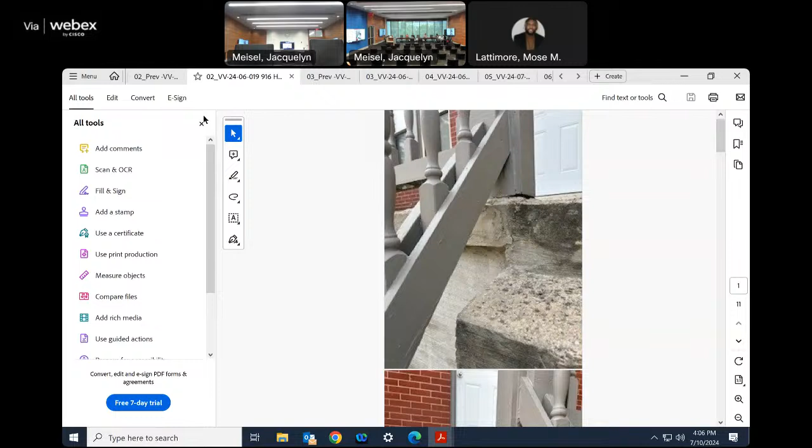I'm gonna have to abstain for 911 Neal Avenue, just based on proximity.

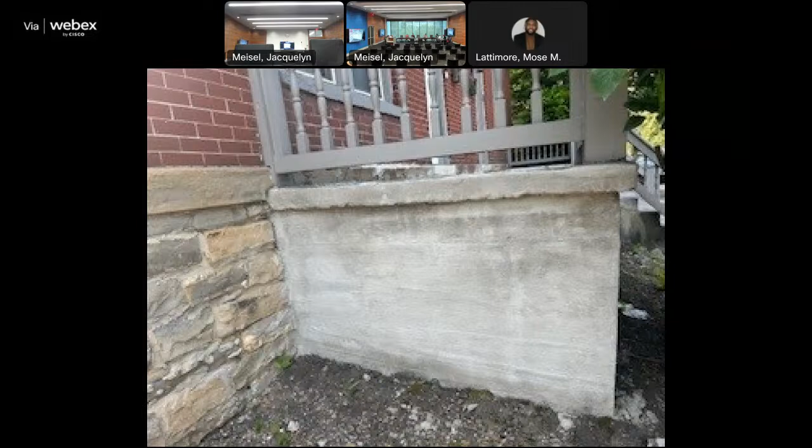They would be bringing new tread, riser, and distance from the sidewalk into code compliance, and in doing so, altering the existing porch landing by removing a 10.75-inch deep cut to allow for the new stairs. The existing handrails would remain, or if not code compliant, stair handrails would be replaced with ones that meet code and painted to match the existing porch railings.

If the landing is hollow, the applicant will pour a new footer approximately 18 inches in length, and the width of the stairs 83.50 inches. The length will be 12 inches back toward the house, with 6 inches extending past where the first stair would begin. The new block would then be laid out from the footer to the edge of the porch, and that 83.50 inch opening would provide support to the porch slab on the entire perimeter, which is how it is currently constructed.

So at the area where the stairs meet the slab, there is a small curb around the perimeter above the base walls of the porch. The first option is to wrap the curb around the first stair where the cutout of the slab will be. The curb will be slightly longer in length on the inside of the stair, and the first stair will be slightly shorter in width, but would still be code compliant in both options.

Option 2 is to start about 8 to 10 inches from where the curb meets the stairs and gradually grind the concrete down, and the curb transitions into flat.

We have the prior staff analysis included, and so the staff recommendation is to recommend approval of application VV240619 at 916 Harrison Avenue, with the condition that if the landing is hollow, scaled and measured section drawings are to be submitted to HPO staff detailing construction of the new landing and steps. That recommendation is based on the city code for standards of alteration 3116.11. I believe that is it, so I'll turn it back over to the commission.

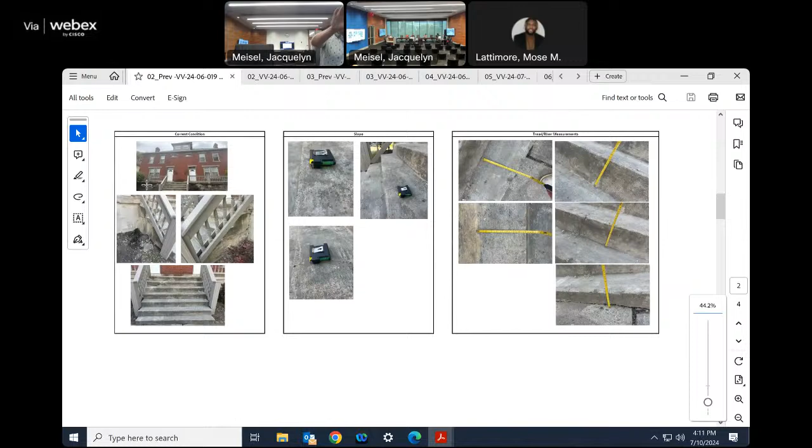Or we just pull that curb all the way around, keep it going, and where you're doing the cutout with the new stairs, it just transitions into the back of that first riser. Awesome, so that way it kind of keeps it all the way around and keeps the aesthetics.

Awesome. And then at the same time, the recommendation from staff - probably, did you hear that in terms of being able to provide drawings, if all of a sudden the slab is hollow, being able to provide drawings that would give them a better understanding of what's necessary for those details prior to execution? Staff is asking for - I did kind of walk in, I think, as that, so if we could just get a little bit more detail on that, so I understand, would be helpful.

Would you be able to just repeat that recommendation component? Yeah, absolutely. Thank you. So the staff recommendation is to recommend approval of the application with the condition that if the landing is hollow, scaled and measured section drawings are submitted to HPO staff detailing the construction of the new landing steps. Okay.

So for the drawings, I could mock that up and resubmit tomorrow. The difference is just going to be whether we're installing additional cinder block. I think from a standpoint of illustrating the scope of work, that gives the staff something to look back on.

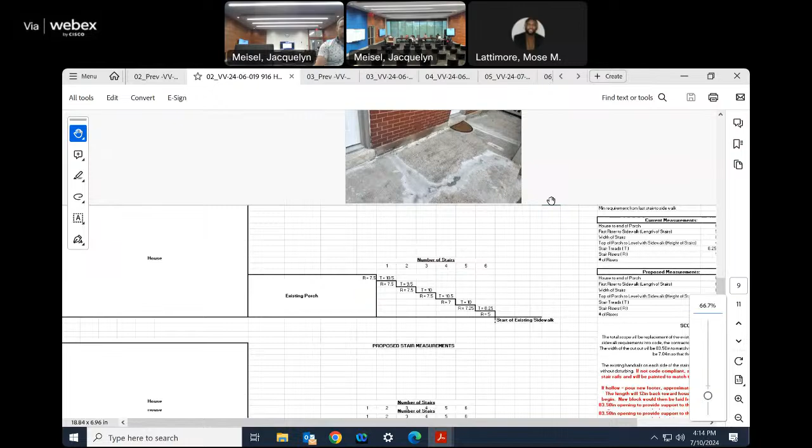I would also say the condition that if the handrails don't meet code, the code compliant ones will also be resubmitted. Yeah, I had that on my list too. Perfect, awesome - that's the railings themselves, right? Yep, I did see that. Okay, that I don't think we'd have to have ahead of time.

Absolutely, yeah, we'll do stairs and figure out the railing after, and just ask them to come back if I have to, or if it's administrative, whichever - but yeah, separate approval process.

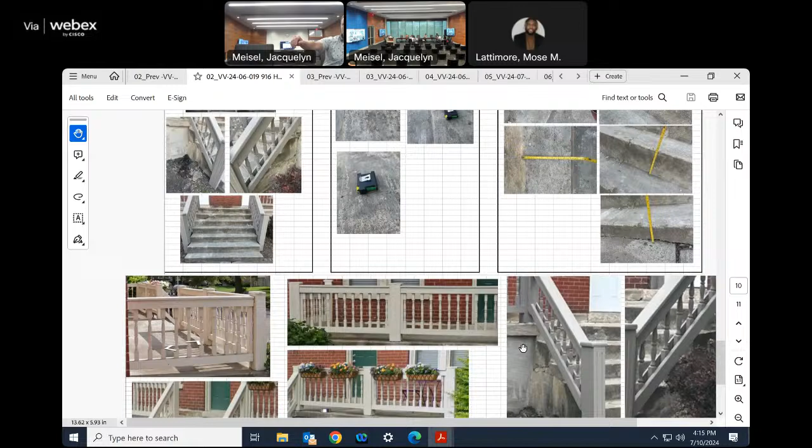Okay, very helpful. And then, would you be able to scroll up to the mock drawing, so I get you guys what you're looking for? I tried to do my best there on the bottom one. Do you just want a little more detail as far as here's where the cinder block would be? Yes sir, easy enough.

Kind of thinking about a cake, and you're taking a knife and going through it, and you open it up a little bit and see the side elevation of those conditions. Yep, I think that would help them. Some anticipated dimensions gives them a little something of how that works.

Awesome, all right, is there a motion? Yeah, motion on application VV 2406019, 916 to 918 Harrison Ave, to approve the application as submitted with the following conditions.

The owner is going to submit scaled section drawings ahead of time, so that in the event the landing is hollow, that documentation is there and work can continue to happen. The edging of the porch - the curbing will be extended along the new stairs. And as a clarification, railings and approval of any railings are not included in this application.

Is there a second? Second. Any additional discussion needed? All those in favor say aye. Any opposed? Motion passed. All right, thank you sir, appreciate everybody, have a good one.

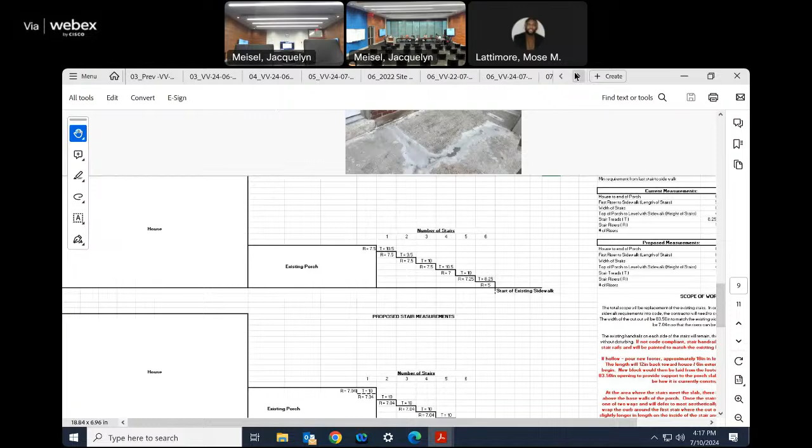Which application are you here for? Greg Zanitos, 76 Bowles.

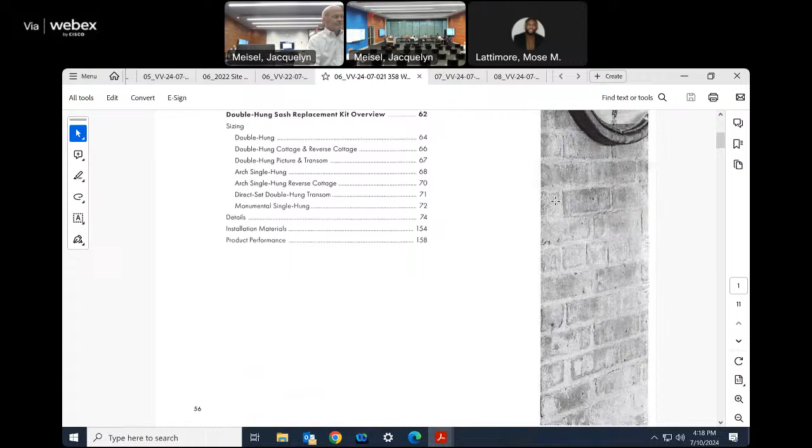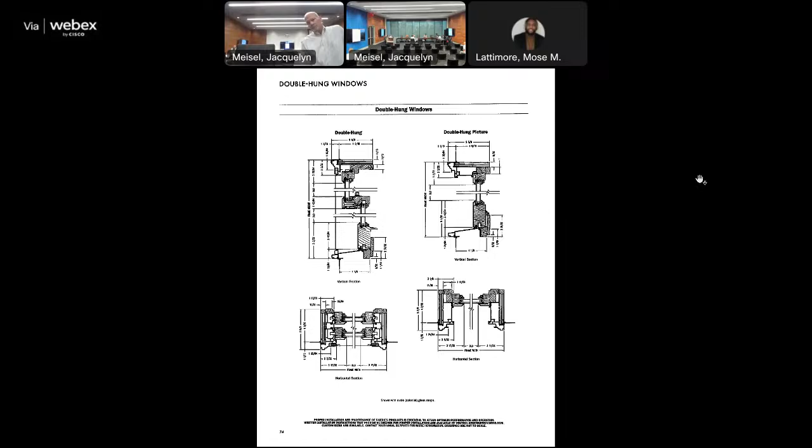All right, so this application for 356-358 Wilbur is proposing to remove and replace the original windows on 358, which is the left side of the property, with Andersen E-Series double-hung windows to match the third floor window from a test case in 2022.

So the applicant has clarified that only one window was replaced and the others on the side remain in place. The third floor window was approved to be replaced with the Andersen E-Series in 2022 as a test case. The full replacement was also proposed during the 2022 application. That portion was continued at the September 19th, 2022 hearing.

The commission comments from the hearing included the following. Fisher said that they sympathized with the applicant regarding the windows. Some of them do recommend repair. It's recommended to reach out to Columbus Landmarks so that they retain with subcontractors to do work such as window repair. So HPO staff had previously determined that the windows should be retained and repaired, having conducted a site visit on June 24th, 2022, with myself.

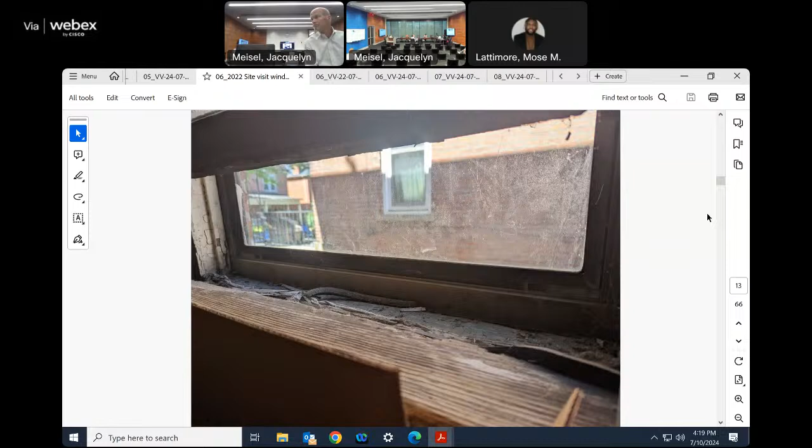No applications for repair have been received, so the commission will need to determine if the remaining windows should be retained or replaced. If the commission determines that the existing windows can be replaced, HPO staff highly recommends that the first floor picture window on the front elevation is retained and repaired. This is because those windows can often be difficult to replicate, and also due to their location, they're often the best preserved window, being underneath the porch there on that first level.

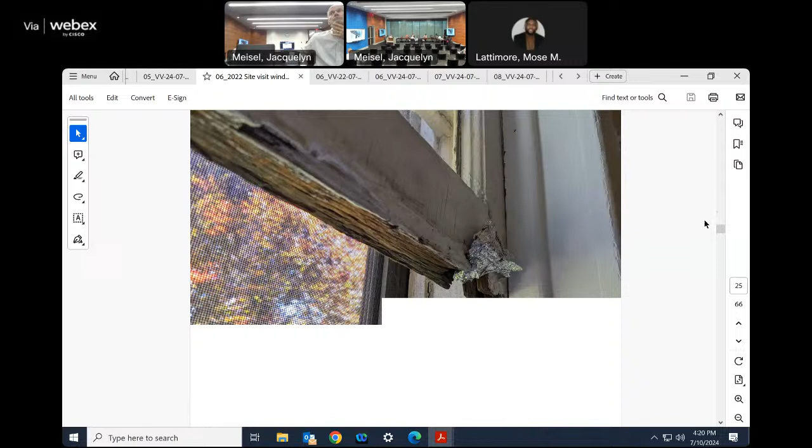Additionally, HPO staff would recommend replacement windows from the approved windows list. So far with the Andersen windows that we had seen, the proportions and the thickness of the stiles and rails are not quite meeting the historic window proportions, and there's some details that don't quite match, such as miter corners that I see on Andersen windows.

So the staff recommends continuation of application VV 24-07-021 at 356-358 Wilbur Avenue to allow the applicant time to submit additional detailed photos of the currently installed third floor test case window. The basis for the staff recommendation is the Victorian Village guidelines regarding windows and doors, as well as the city code standards for alteration.

3116.11, and then some additional city code here, we have the amendments to the city code regarding window replacement. I think that's all for the staff recommendation.

Thank you, Jen. Can you state your name, sir, and be sworn in? Gary Batke. Perfect. Do you agree to tell the truth and nothing but the truth? Yes. Thank you, sir. All right, I'll turn it over to you.

Okay. I filed the original application to replace the windows in this property back in June of 2022. The reason I did that is because the windows are unsafe. They've got lead paint on them. Many of them do. Most of them are not operational. It's a fire hazard.

I applied to replace them only after looking for over 6 months to try to find a contractor to help repair them or to solve the problems I just discussed. Anyway, so I filed the application in June of 2022. I got the COA, as was noted, for the third floor windows.

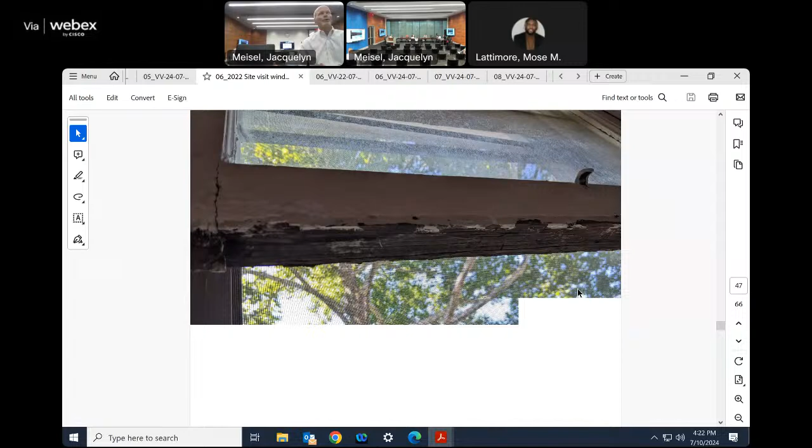I would disagree that they do not comply. They're indistinguishable. During that whole process, when I was at like 4 or 5 different meetings, I brought a cutout of that window. I can bring a cutout of any of the approved windows, and I guarantee you couldn't tell the difference. It's the same material. You couldn't tell it. They look exactly the same. It's aluminum clad wood on the inside.

Anyway, so after that meeting where I got my COA, I proceeded to try to do as you suggested. I called Susan Keeney. She came over. Very nice lady, by the way. Had a nice discussion. She gave me a list of 8 contractors, and suggested that I call a couple to see, because the suggestion from Susan and from you is to see if we can't repair them first. Makes sense, fine. I called, I contacted, emailed, called multiple times, all 8 on this list.

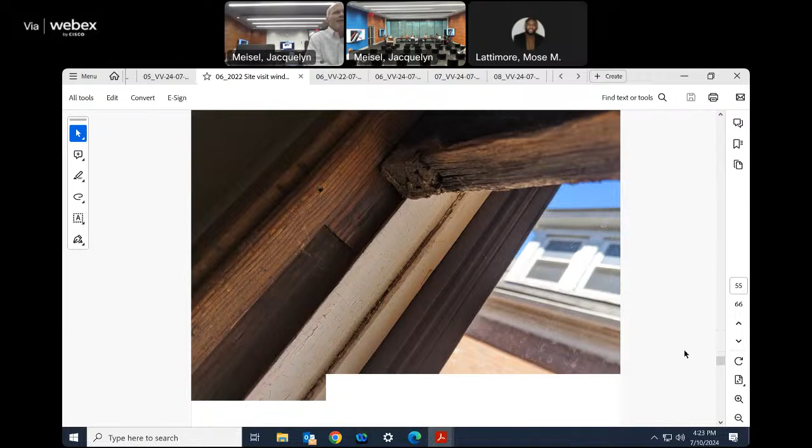4 never returned multiple calls or emails. 2 are no longer in the business. 1 promised to contact me sometime in 2023 when they might be able to squeeze me in. I'm still waiting on that call.

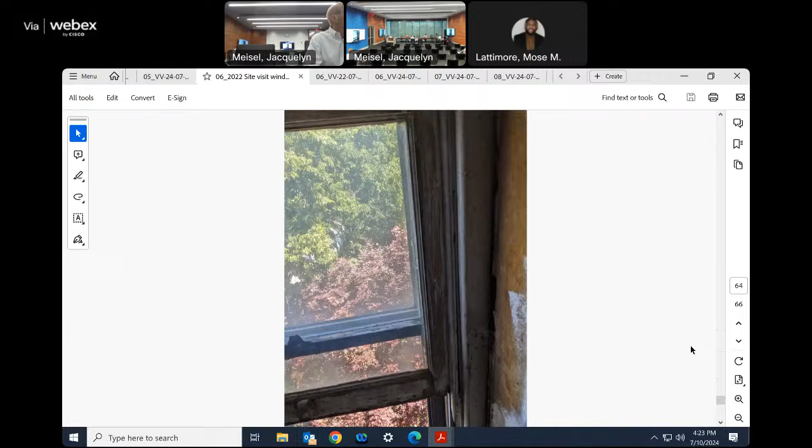And 1 actually came to look at the windows, agreed that there was a problem with lead paint, was to promise to get me an estimate, and then since then has ghosted me. Never gave me an estimate, never returned my multiple emails, never returned my calls.

Don't know if he's out of business, don't know if he retired, don't know where he is. Okay, so I've exhausted that list. So I'm now at the end of 2023. I've got the same problem. I had done everything you asked me to do.

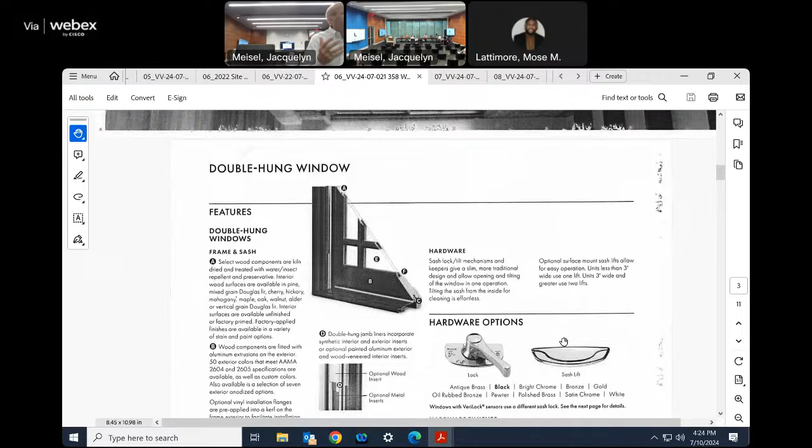I made arrangements to replace, incrementally, the ones on the side of the house, not facing the front of the property. I intended to continue to do what you suggested, and respect the front of the house in particular. But the sides of the house, for all the reasons I talked about, for safety reasons, for energy efficiency, there's really no reason that side cannot be replaced, especially with windows that you approved on its test case, and cannot be distinguished from the windows on your approved list, other than being a different manufacturer.

Moreover, on the side that I started to replace them on, they're literally 10 feet from vinyl replacement windows in the house next to me. So I would ask that I be allowed to replace those 6 windows on each side of the house.

If you want me to continue to try to respect the front picture windows, those 2 front picture windows, I'm more than happy to try to do that. But I've been doing that for 2.5 years. And I've begged the commission, Susan Keeney, and others who say they can be repaired, to tell me who can do it.

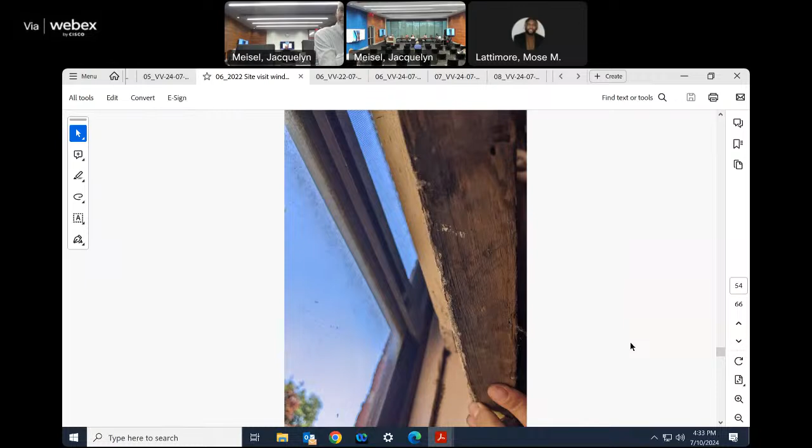Thank you. No, they look to be in pretty solid condition. There's a couple of missing or cut sash cords. We have some glazing, kind of standard fixes that are repaired and needed over time for maintenance, things like that. So if you recall, overall pretty good condition.

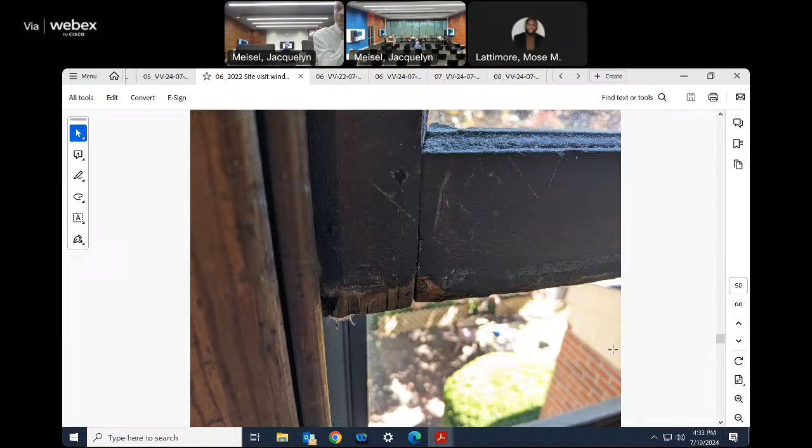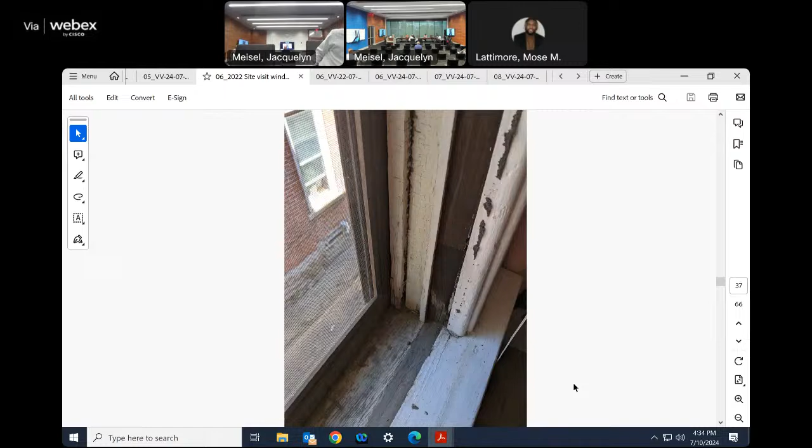I'm not sure if that was during the pandemic with responsiveness from Pella and window repair people. Since we get so many window applications throughout our commissions, I'm hopeful people are more responsive now, whether for new windows or repairs. Hopefully it was just during the pandemic that we weren't getting responses, and new windows were pushed out a year or two.

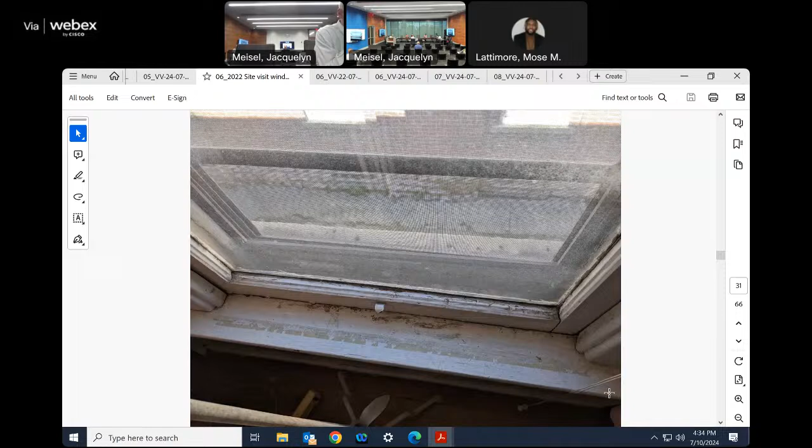I would state this really wasn't during the pandemic. The application started in June of 2022, and I was in contact with these people through the end of 2022 into 2023. We hear so often about supply chain issues, and it continued into 2022, since people who couldn't get things done in 2020 or 2021 were just so backed up. It's common for us to hear of these issues, and not being able to find contractors is very frustrating.

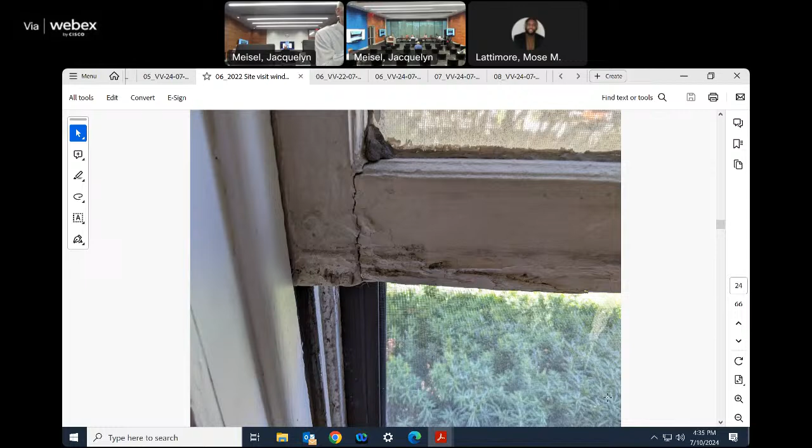As I recall, part of the decision for the test case, we were all here for that, I think. I believe the third floor windows were in the worst condition of the windows we had looked at the time. Right, they were not in great condition, but not necessarily worse.

What I'm struggling with, and what I think we've been fairly consistent about even back to 2022, was having staff look at the existing windows and provide recommendations on whether those could be restored or not. We clearly gave that guidance at the time, and you tried to do exactly what we told you, which we absolutely give you credit for. So we continue to provide that same guidance to other applicants, right?

We had another one on the agenda that got pulled for a very similar type of thing. I want to make sure we're not skipping over that step, and how we want to handle it. If applicants aren't able to find contractors, I think that's something we need to discuss. That's a tough discussion. Staff will need guidance from that perspective, and I think it's part of the test case analysis and evaluation, to Reed's point, about where the threshold is between hardship associated with repair and a condition that pivots to replacement.

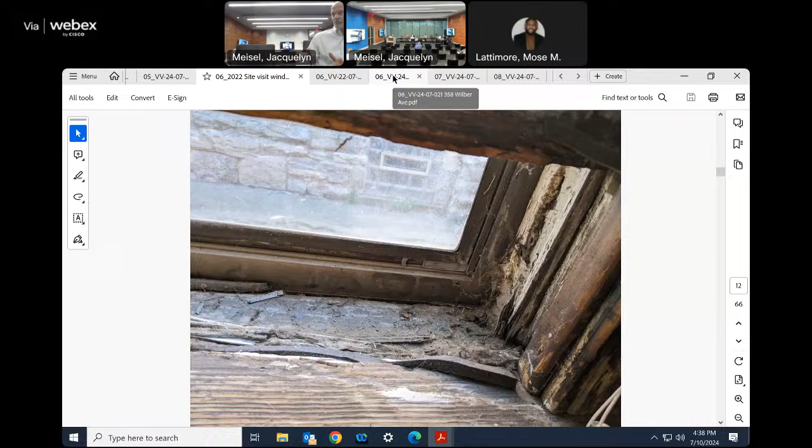So I'm supposed to send pictures of the test window? Yes, if you could send detailed photos of the test window, that way we can take a look and see what is matching up or if things are not matching up.

There's some details that can catch on the side, but I'm not sure if they're exactly the same as the attic windows to the side, or if there's any other details we can take a look at and evaluate. I'm happy to do it. A little bit of a problem, as you can see - that's 40 feet in the air.

The interior side is good, and if you're able to, depending on how your attic situation is set up, have a camera - we're still safely inside the building - take a photo kind of close up, rather than a selfie photo with a ladder. I can try. Okay.

We don't want you having to go on the roof or something. Well, I think it's the same window as the one downstairs, right? Yeah, exactly. So if you can get more detail shots on that one, and if we know those apply to the upstairs one - not saying we don't want pictures of the upstairs one, but that'd be helpful, that might make it a little easier. Okay, I will get those to staff.

Staff will provide maybe some old meeting minutes or applications of where windows have been repaired, and that relates to this contract. Oh yes, we can take a look at some recent ones that have been responsive for folks. Correct. Thank you, Reed, appreciate it.

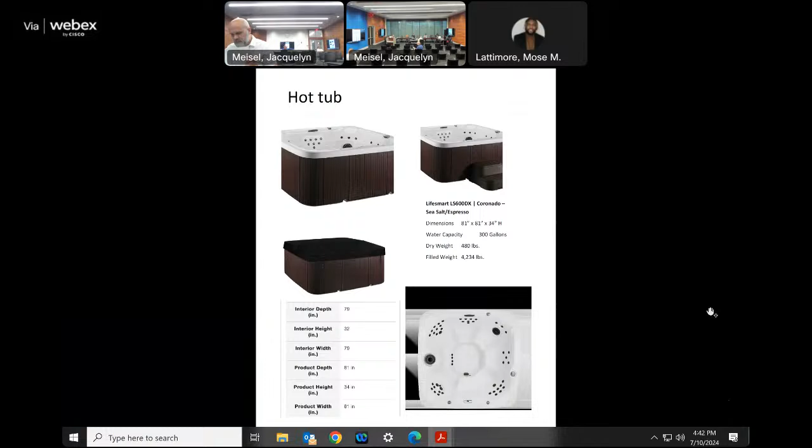So we have the staff analysis from the prior meeting in June, and the commissioners should discuss if the bocce court is an appropriate landscape feature and whether other similar courts would be allowable in the future, and the overall height of the proposed gazebo should be discussed.

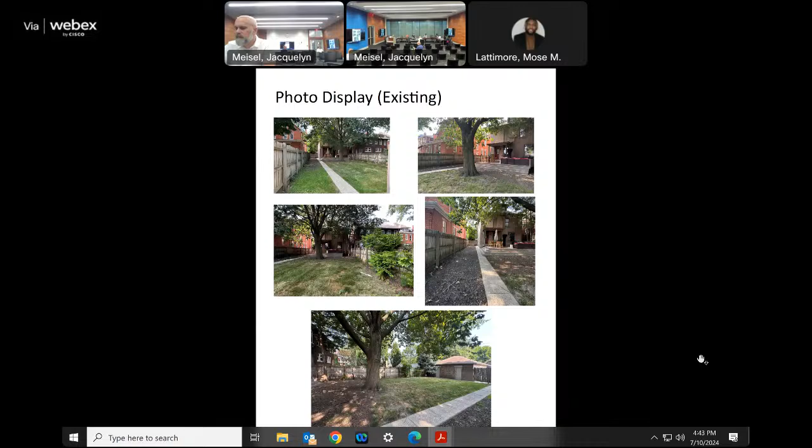The staff recommendation is to recommend approval of application BB 2406025 at 110 West Second Avenue with the condition that a scale measured elevation drawing of the gazebo in relation to the garage is submitted to a subcommittee review or to HPO staff prior to issuing a certificate. The basis for that recommendation is City Code 3116.13 standards for site improvements, as well as the Victorian Village guidelines regarding fences and accessory structures.

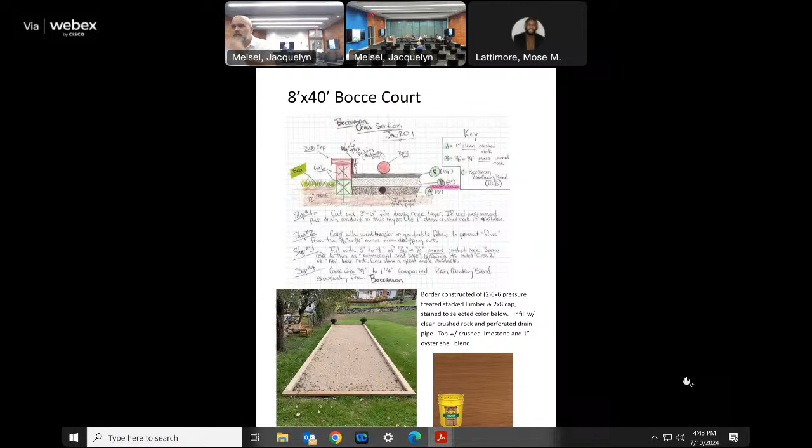Awesome, thank you Jack. Just a clarification - staff's recommendation talked about a pergola, I think they meant the gazebo. Oh, thank you, we'll make sure. Yes, that's right, the pergola mention is separate.

Thanks, Reed. Can you state your name, sir, and get you sworn in? Thaddeus Jones. Do you agree to tell the truth and nothing but the truth, sir? Okay, all right, so I'll turn it over to you. Anything you want to present, or just kind of walk us through - I think you got the latest site plan there.

Basically, I think we talked before about maybe elaborating the canopy, the tree a little bit to show that more realistic, which I'm showing there now. So it gives us a more realistic view of how that tree is in position to the landscaping elements. We also shifted the gazebo structure back a little bit, so it's not underneath the canopy so much.

Also, the owners decided not to do the fence, so we are eliminating that out of the context here. After a closer examination, I think it's going to need to be replaced sooner than later, but he doesn't want to deal with that right now.

Let's see, other than that, I think that's it. Okay, perfect. Thank you, sir. All right, Commission, are there any thoughts or questions?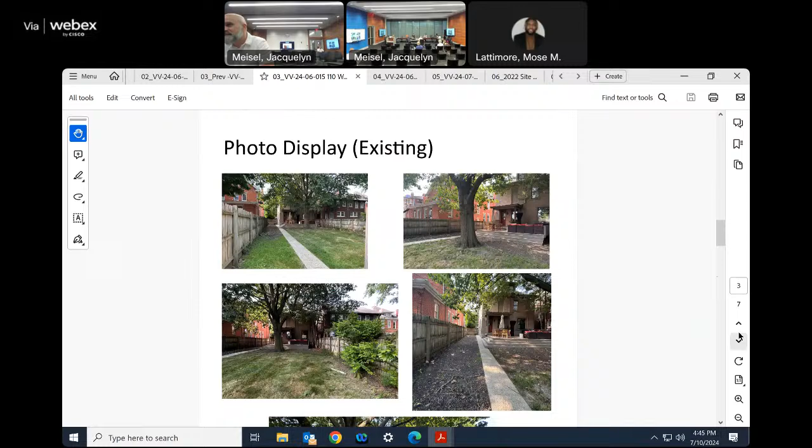And then it makes sense in terms of the height. I think that they were asking for a scale drawing just to kind of clarify the height. The perspectives that you did were great in terms of being able to get elevation, but just being able to try to understand the height of it related to the garage - I think that's what they were asking for in terms of clarification.

As far as this one, since the last meeting, no. Yes, I think that's what the staff was just mentioning. Gotcha. Yeah, okay, so you just need the actual dimension of it?

So, for instance, the eave height of the garage is X, and then the proposed eave height of the gazebo was X, and that probably would suffice, being able to clarify that.

I mean, I should have started with, I think it's an improved design. So I think we're better than where we started. So I appreciate you guys, you and the owner, taking the feedback seriously and coming up with some alternatives here.

I don't think I have anything to add. Do we need to know what plants there? For instance, that shrub - it says new shrub. Where's Tim when you need him? You know, Tim would be able to help us a little bit.

Well, that sounds like a subcommittee and all this stuff. Yeah, do you get that detail? Okay, yeah. And so typically it is being asked what are the species, just a little bit more understanding of that. If Tim was here, he would definitely make sure that we're asking that question.

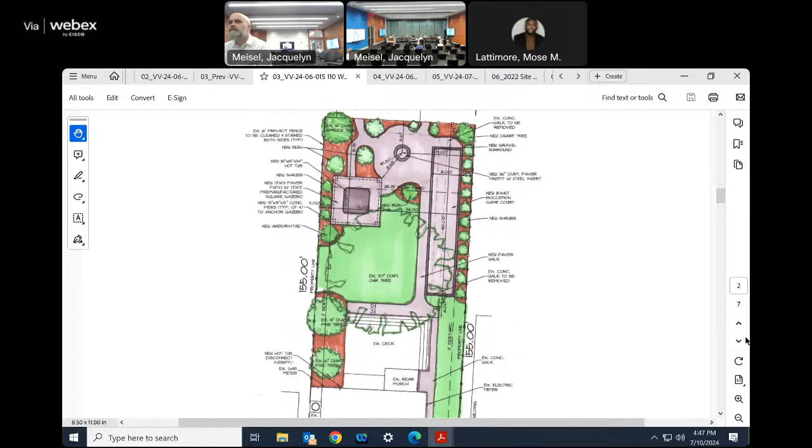Is there a concern on like the type of plantings? Is it something that can be moved to staff, or would you prefer to put to someone? It kind of sometimes gets pivoted back to us because Tim kind of likes - do I put Tim on the committee if he's not here? Yeah, we're gonna, I don't know whether we can. By default, he would want to be on. Yeah, exactly, just to help the application move forward.

Perfect. So is there a motion then? And what about the bocce court?

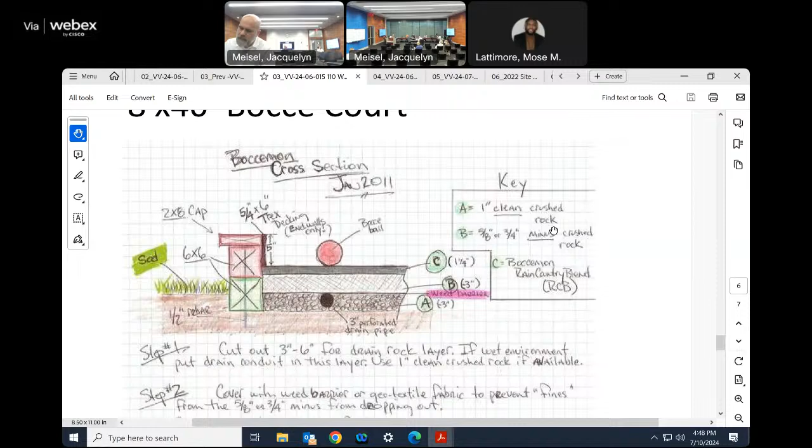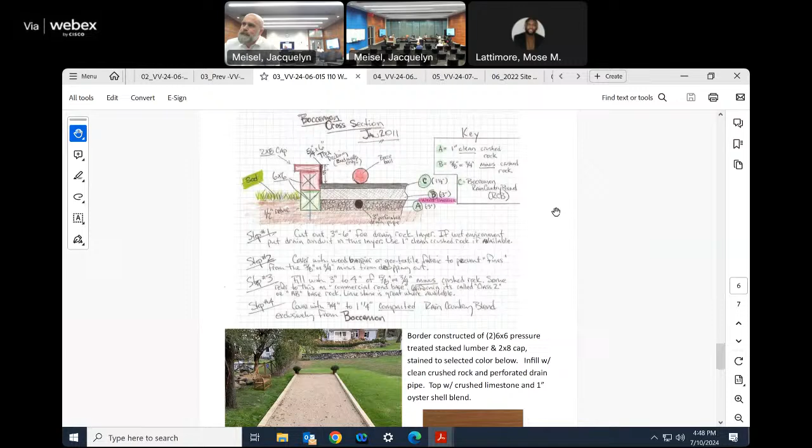Anything to add? I know we talked about the bocce court last time, and it didn't seem like there was any concerns. Right, yeah, the staff had some concerns, that's why I'm just making sure. I think it's just more, if I remember correctly, it was our unfamiliarity of a bocce court being introduced into a project, but it seems like the sensitivity to what it is, the picture helps too, picture height helps, and materiality - there didn't seem like an issue. It's like, yeah, it's cool.

All right, well, I think we can do a motion. Motion on application VV-24-06-015, 110 West Second Avenue, to send the application to a subcommittee for their review of the height of the gazebo in relation to the garage, which the applicant will provide those heights and details for review, and review of the plantings also to be provided by the applicant for subcommittee review.

Subcommittee is going to be Tim Skinner. I'll do it. Pete Schuler - I'm not a plant person. You're not, well, you're a height person, I don't know. I'm not either, but I'll do it. I guess I'll be the third. Awesome.

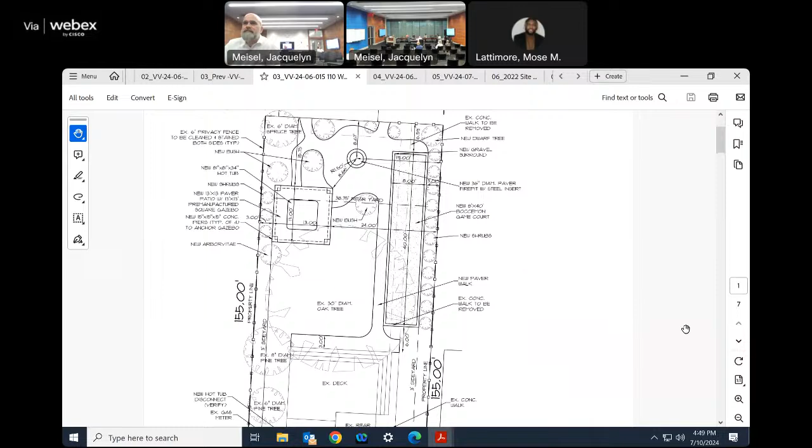We're gonna say something about the asphalt versus - oh, thank you, yes - that the roof for the pergola will be asphalt, and not steel, which is in some of the pictures.

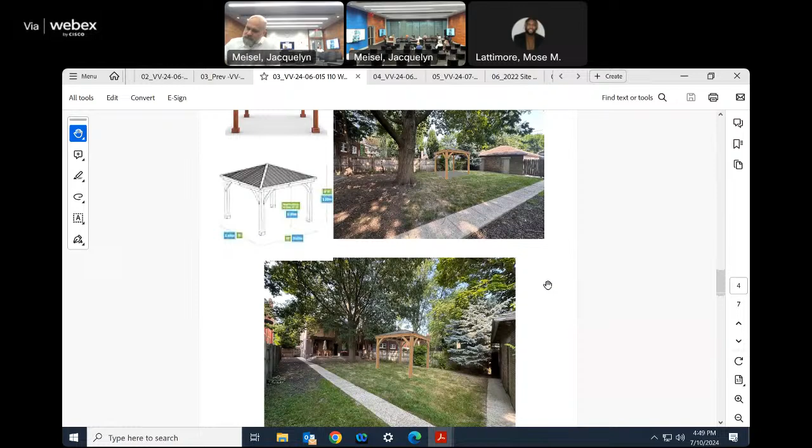Is there a second? Second. Just thinking about the asphalt roof, when would they have to select a shingle? The shingle needs to be on the approved list, so I would amend my motion to include that the shingles need to be on the approved checklist. Ideally complementing the main house, et cetera, but that's staff approval.

Does that amendment to Reed's motion get accepted by whoever seconded? Yes. Any further discussion? All those in favor say aye. Aye. Any opposed? Motion passed. Great, thank you.

Okay, so next up we have 721 North High Street, also 7 Buttles Ave. Hello. Hello.

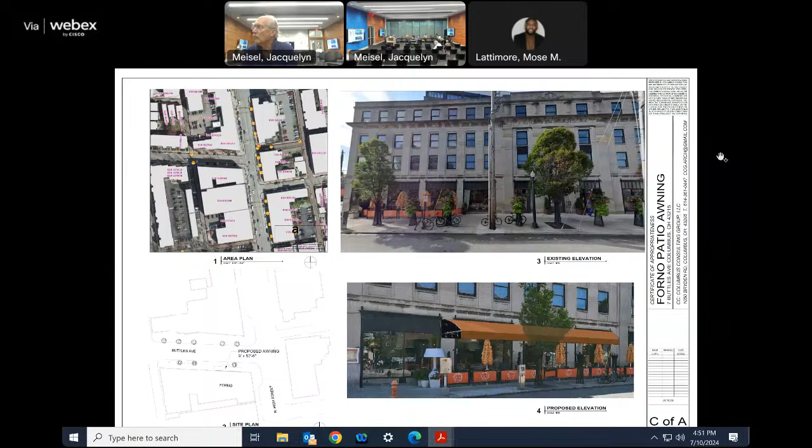This application for 721 North High Street and 7 Buttles Ave proposes to install a barrel awning over the existing outdoor seating area along Buttles Ave. Commissioners at the June business meeting noted that the proposed awnings cover the transoms, which are contributing architectural features, and were hesitant because of how much work was previously put in to retain the transoms. A suggestion was made for having 3 separate awnings over the space. The commission asked to know the overall plan, such as whether a year-round patio would be proposed, a scaled and measured elevation drawing showing the proposed or existing facade, and a large site plan marking the right-of-way and the awning overhang or existing elements.

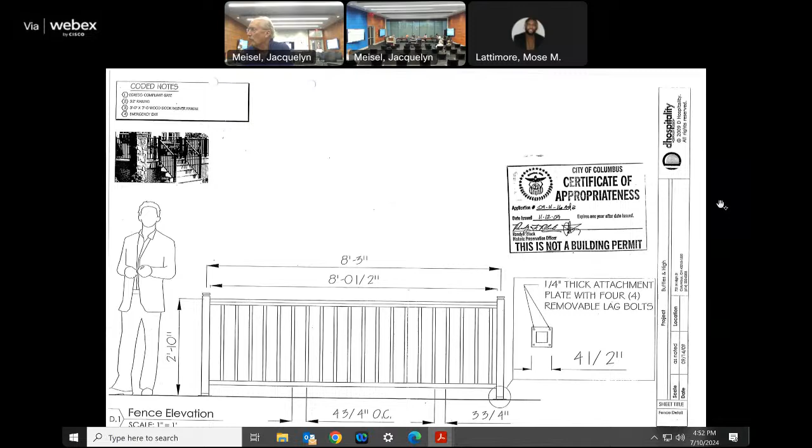The owner had previously inquired into awnings over the patio, and HPO staff had recommended individual or separate awnings as opposed to continuous ones. The Bakersfield at 733 North High Street had continuous awnings, but a reason for their approval was not provided. The proposed awnings will obscure an architectural feature, but the Short North design guidelines do support installation of awnings so long as it does not damage or impair architectural features and reflects the architectural character and treatment of the building.

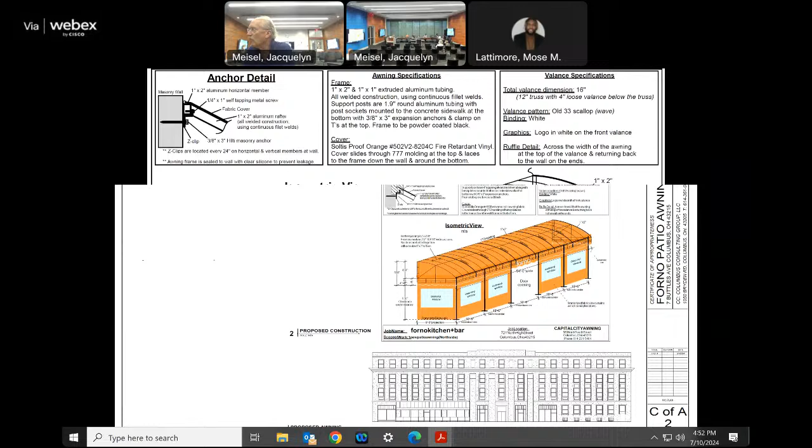So staff recommends approval of application VV-24-06-022 at 721 North High Street, with conditions that individual awnings over each section of the roof are installed, the hardware is installed with consideration to the transoms so as not to damage them, and revised materials are reviewed by the commission subcommittee and HPO staff prior to issuing a certificate. Staff recommendation is based on city code standards for alteration 3116.111, as well as the Short North design guidelines regarding awnings and canopies.

Thank you, Jen. Can you state your name, sir, and get you sworn in? Yes, John Ingwerson. Do you agree to tell the truth and nothing but the truth, sir? I do. Thank you, sir. All right, go ahead and turn it over to you.

You heard staff's recommendation and thoughts related to the application, so I have to recuse myself. Okay, no worries, sorry, I should have said that. Understandable.

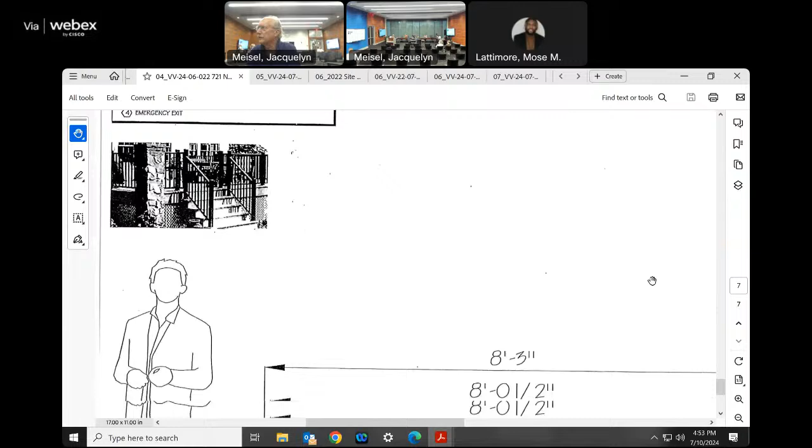Well, the last time I was here for the business meeting was 2 months ago. And also Jacquelyn, I did do the 2 elevations, hand-drawn, which I believe I sent to you - there, I just filled in for Kimberly today. There's one, and there's a second one above. One is with columns, and one is without columns.

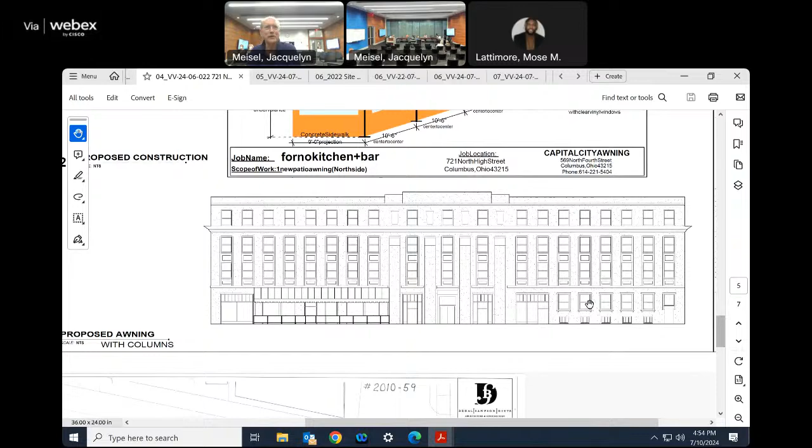Jerry Reiser from the right-of-way folks, for the right-of-way lease - they're on the fence as far as whether there are columns or not, because restaurants go out of business and leave, and the city right-of-way department has to take whatever remnants were left down.

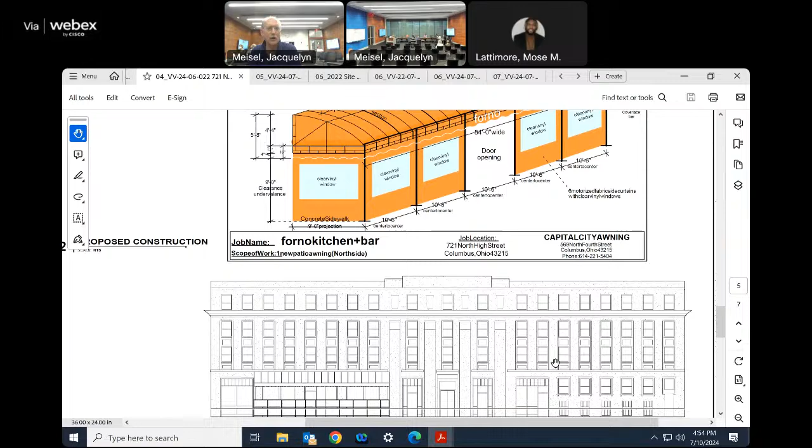So they don't particularly like columns, but the lower rails are currently attached to the ground and were part of - I'm sorry, I forget the name of the Chinese restaurant from 2000 - but that was the previously approved and leased patio. The owners of Forno want it to be 3-season or 4-season. They want to operate through the winter, and they have really high demand.

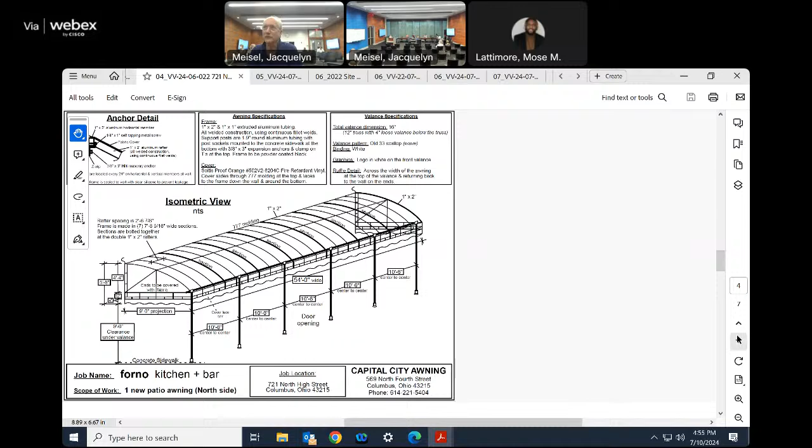It's obviously understood that separate awnings would perhaps set up better with the rhythm of the fenestration on the building, but they want to enclose the whole place for winter and bad weather, and having a gap between each of the awnings doesn't appeal to anybody that would be eating or try to use that space throughout the wintertime or rain events.

So the last time I was here at the business meeting, they asked, hey, do you want to use this thing and put sides on it? And I said I didn't know, and got back with them, and that is an updated rendering of our isometric from Capital City awning, and the curtains do roll up or come down. They're detachable, so they wouldn't be there until it got cold enough that they would need a heater or whatever underneath. And the heaters they would use are the stainless steel jobs that have the tank and sit on the inside, unattached to anything.

So we have a drawing showing where the posts are in relation to the existing facade of the actual building. Do I have a drawing showing that? So I'm looking at Kimberly's staff report here, and I see it mentions that previously a scale measured elevation drawing notating where the posts are for the existing facade was requested. Just want to make sure if we already have that or not.

Yeah, that's that's the lower element, the lower picture, yeah. That's it.

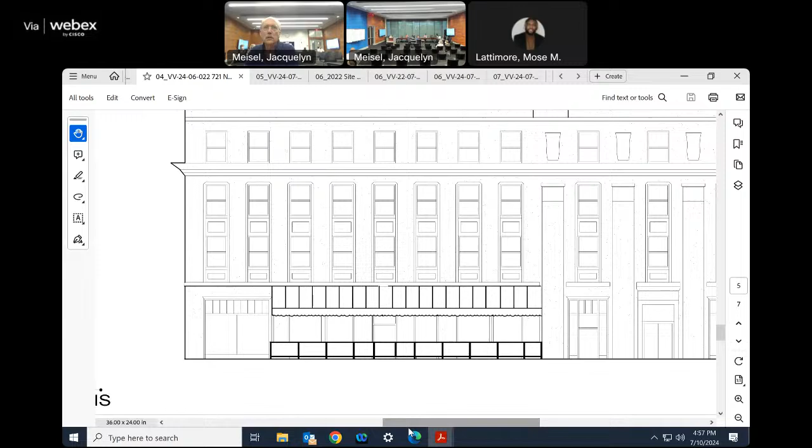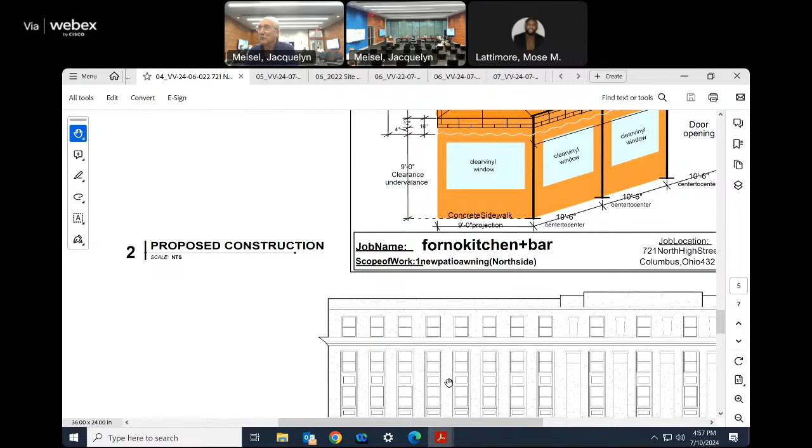Okay, anything else, sir? No. Shift over? Okay, answer anything that you would have. No worries. Thank you, sir. Appreciate it.

All right, so just thoughts. So it seems like staff, I think what Kimberly was trying to better understand is how does one contiguous awning still kind of align with the existing fenestrations and those elements versus the individual awnings that would respond to those openings directly.

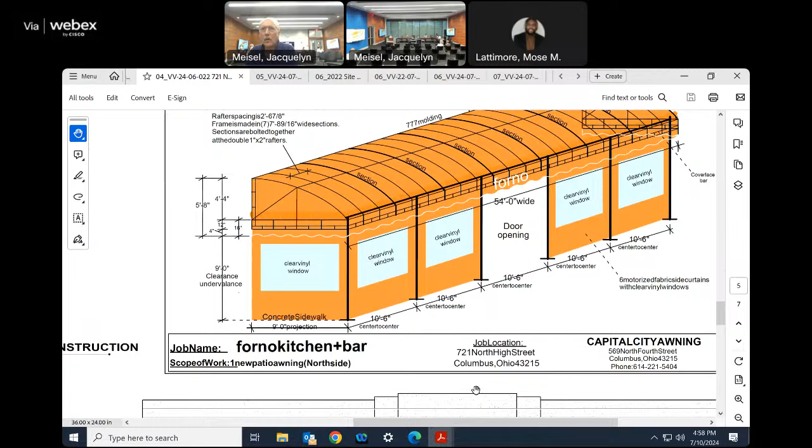So I'm gonna take it this way and see how it goes. Short North guidelines support installation of awnings, so long as the installation does not damage or impair architectural features and they reflect the architectural character and treatment of the building, right? So thank you, so using those criteria, then what do we think, right? And putting it in that context, a barrel arch does not say to me historic or reflect that building's particular architecture.

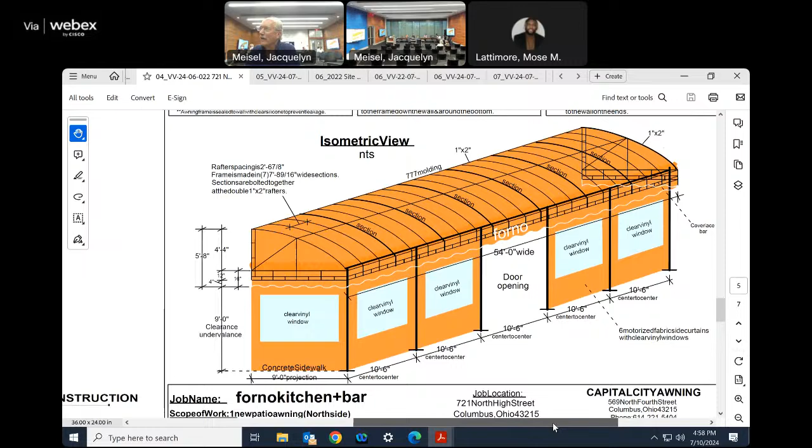It does obscure the transoms with putting one on. I understand exactly why they want to do it, right, to extend the space for the restaurant. But it does hide that architectural feature, which is fairly prominent on this building. Whether there's posts or not, I think is much less relevant to how the whole thing would fit together, and the fact that it's a barrel arch. And then the new thing that's added is the enclosure, which I think adds a whole other level of concern. I mean, that then obscures the entire storefront and the stonework, right, everything that's historic about the first story of the building.

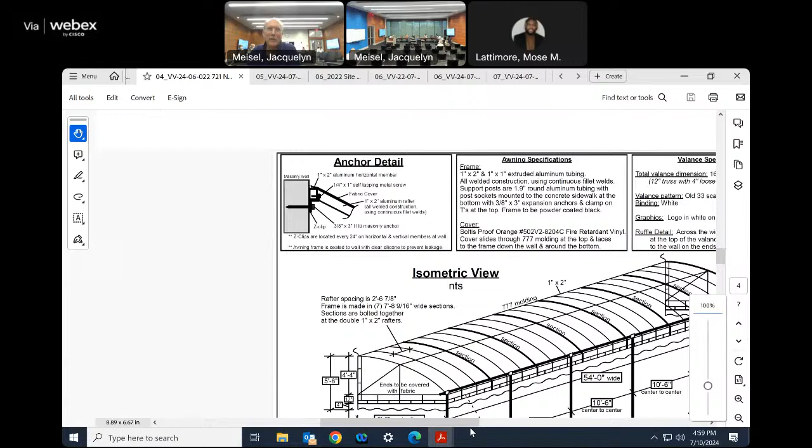For probably, let's be realistic, 6 months of the year. Yeah. Reading the Short North guidelines, I don't know how it could have been approved. Right, I would agree.

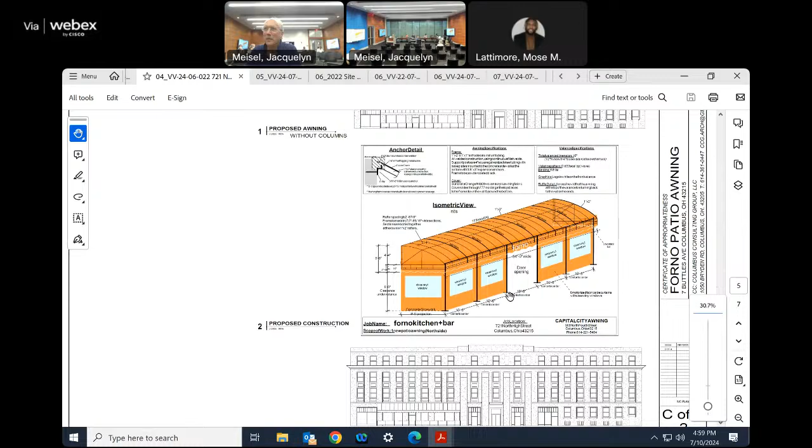Do you want to take it to pieces or? No, I don't know what part of it I couldn't approve. Right, I think that's what Kimberly was trying to extract out of the questions without necessarily directing, the applicant is trying to extract that feedback to help. How does the applicant satisfy what's written in the guidelines? I think that's what she was asking for.

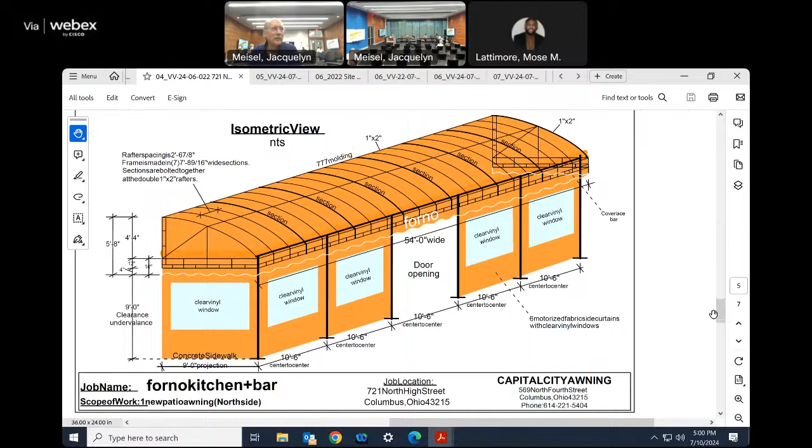I think we could give guidance to that. I mean, I think the barrel, it should not be a barrel design, right? It does need to be separate between the windows, which I think pretty much takes out of the picture the need for the sides. And I think the posts also should not be there as well.

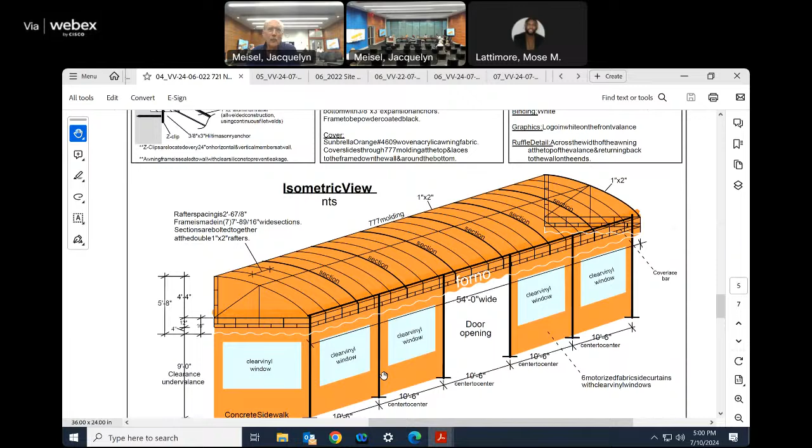I agree, and I'd want to see exactly how, because you're either attaching it to historic stone, which means you're permanently damaging that stone, or you're permanently attaching it to a cast iron storefront, which is also permanently damaging the cast iron storefront. Right, so we need to see all of those details as well for how that would work.

Well, I mean, okay, so we're having a discussion now about how, now, all of those transom windows are painted out. They are glass, but they're painted out. And so it gives it the look like it was considered a metal sort of thing, but it's not. It's glass with paint.

Stone and, but I guess the other point is, if it was to be done, I imagine that the way to do it would be to do it freestanding, so you didn't damage the building, and that you actually had columns, small tube steel that was against the wall that was screwed into the sidewalk. And then some sort of a gasket, a crushable seal that kept the weather out as it touched the building and didn't hurt it.

Unfortunately, there's a building directly across the street that's another bar that has black continuous awnings with columns. And so this owner doesn't... let's just say the owner of Forno is a character, but I imagine everybody that owns a bar is a character. So he's saying, hey, well, the Woods own the building anyway, he's a tenant.

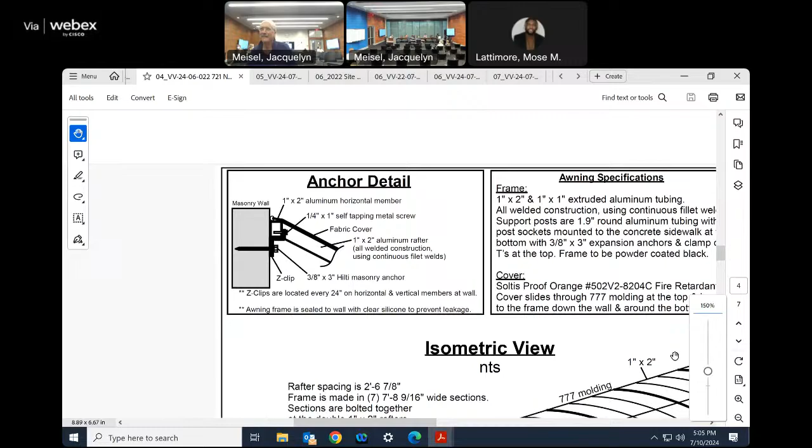Yeah, please. Okay, motion on application VV 2406022, 721 North High Street / 71 Buttles Avenue, to continue the application to allow the applicant to further refine the design. Is there a second? Second. All those in favor say aye. Aye. Any opposed? Let's continue. Thank you, sir. Appreciate it.

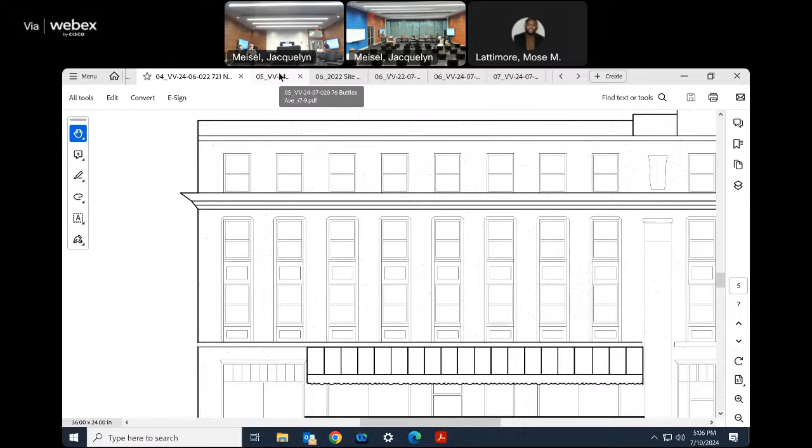Evening. Alright, so 76 Wells Ave, the proposal here is to remove the existing slate roof and install a new Vermont slate roof, for the commission's documentation. So the original approval for the roofing on this building included shake shingles on the roof, which today HPO staff would not consider an appropriate shingle. But regardless of that, instead of the shake shingles, higher quality slate shingles were actually installed.

So the structure we're looking at was constructed in 1984, therefore not historic. And overall, I think the design change is the reason this application is on the agenda. So the commission should discuss if the change in slate size and color is appropriate. Staff recommends approval of application VV-24-07-020, 76 Buttles Ave, with any and all clarifications submitted to HPO staff prior to issuance of certificate. That recommendation is based on City Code 3116.11 standards for alteration, City Code 3116.12 standards for new construction, and finally the Victorian Village guidelines regarding roofs.

Awesome, perfect, thank you. Can you say your name, sir, and get you sworn in? Nico Henderson. Perfect. Do you agree to tell the truth and nothing but the truth? I do. Thank you, sir.

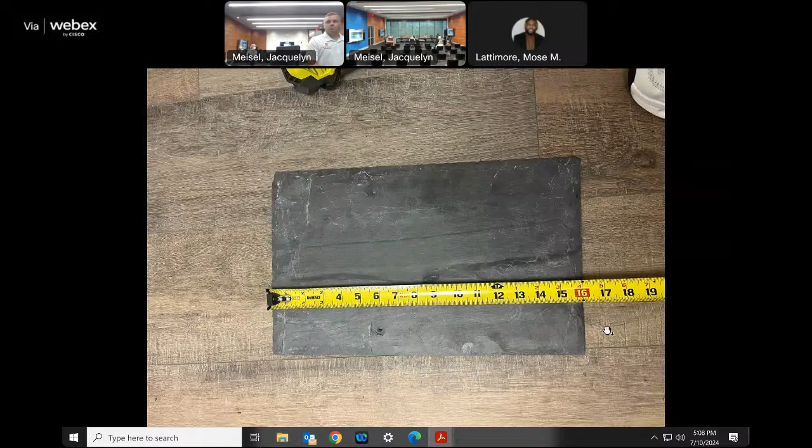Anything you want to add to this project or description? Just pretty much the insured called the insurance company after he had some missing shingles. They deemed it unrepairable and had warranted for full replacement.

Any additional comments? I think it was really kind of just the variety, or the variation in size and potential color from the images that Kimberly was bringing back to us. I gotta defer to you guys on slate. Any thoughts? The slate is fine.

I'm still shocked that they said you have to tear off 1,400 square feet or whatever of slate to replace 6 missing slate, but... Well, they don't match, you gotta understand. It's not my money. Any concerns at all? I don't have any doubt.

Materiality is the biggest thing for me on this. Yes, slate for slate. I don't understand, but it's a little unusual. So sometimes when we have a roof replacement, it's slate for slate, and we actually ask for certain things.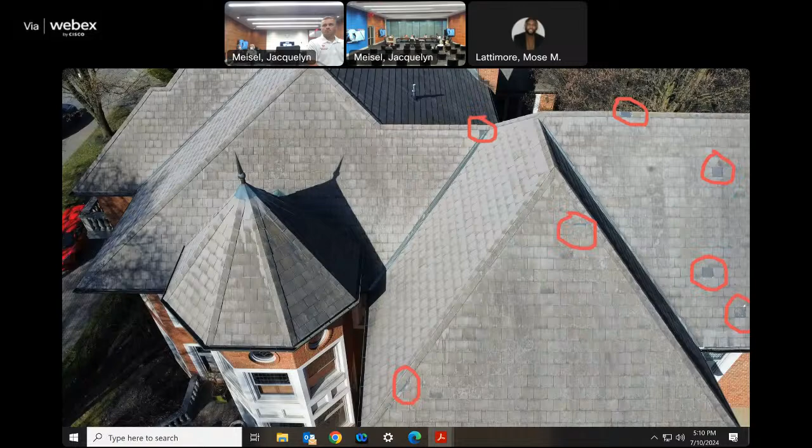So I don't believe we would need the slate documentation removal with it not being historic. Okay, as long as you write all that down, I think. Right, exactly. So I think that's a good point. If the commission is comfortable, just note that as part of the legal record. Yeah, you got it.

Okay, so is there a motion that captures the spirit of that? Yeah, I'm just curious, so you guys do slate regularly? This is another question that comes up. I can't find anybody that does slate, right? Although this is also a different use.

I'm just looking for the application. Yeah, no worries, take your time. VV 24. I got it, all right.

Yes, motion on application VV 24-07-020, 76 Buttles Avenue, to approve the application as submitted, with the justification as noted by Jack: it's a non-historic building, like for like material, there's a size difference, but in fact most of the details are there, and there is a slate assessment provided.

Awesome, so fantastic. Is there a second? Second. Any further discussion at all? All those in favor say aye. Aye. Any opposed? Motion passed.

Thank you. Thank you, guys. Have a great night. Likewise. Thank you, sir.

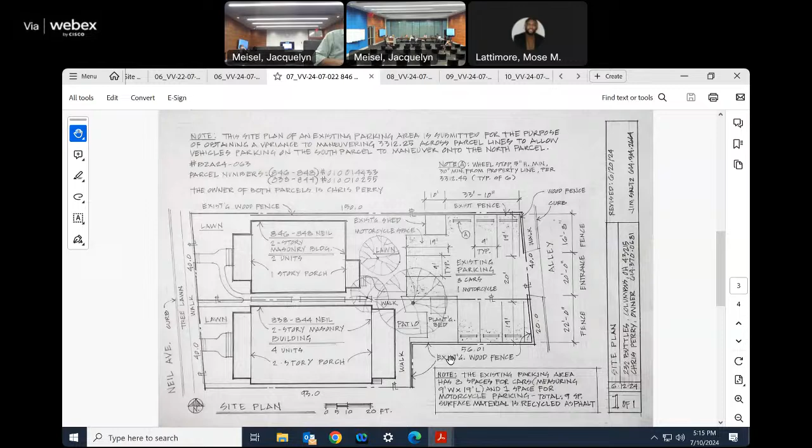Awesome, thank you sir. Any questions or concerns? What spurred this application? What caused you to come to the commission? He was doing work on the southern building, the 4-unit, and we had a building permit. There was work going on, and it came to the attention of the city in his conversation with zoning that there never had been a variance received for this. So it's a matter of bringing it up to date and making sure everything's up to code and in compliance. Got it, this is strictly documentation.

Yeah, it's pretty much a legal matter, and I'm here in front of you because all of the surrounding property owners were notified, and they asked for any input and recommendations from neighborhood groups and that sort of thing. So we're just seeking a recommendation from the commission. We've got the meeting in a couple weeks with the Board of Zoning Appeals.

Perfect, so is there a motion to recommend the variance? Motion to recommend VV 2407-022, 846 Neil Avenue, motion to recommend variance for parking maneuverability. Is there a second? Second. Any further discussion? All those in favor say aye. Aye. Any opposed?

Great, thank you so much. Have a good one, appreciate it. The porch is looking good too. Oh, the porch replacement is looking good out front, that's right. It wasn't that long ago I was here. Yes, yes, thank you so much. Thank you, yes. That was the bad wood that was on the alley. Yeah, I was trying to remember the application. I think so.

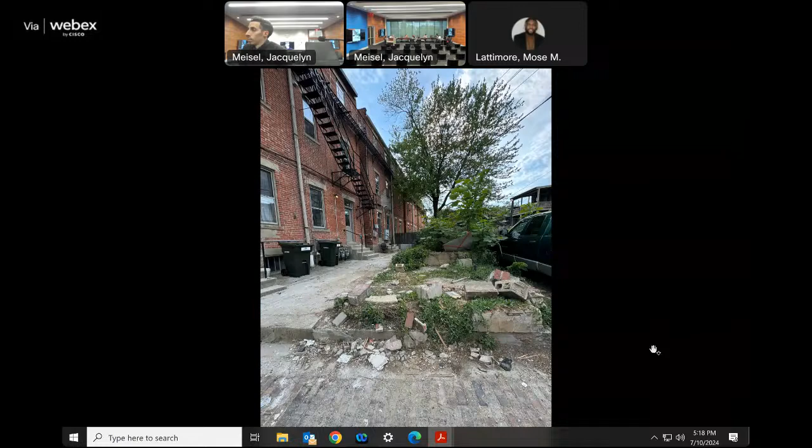The area with the curved retaining wall is low and overgrown, so the question is whether the commission would be supportive of alterations to the retaining wall, and whether a drawing of the updated condition would be helpful at the next review. Since this is a conceptual application, the recommendation is that commissioners offer design feedback that can be utilized by the applicant to further refine the proposal for review at a future meeting, so no action is required. The basis for the staff recommendation is City Code 3116.11 standards for alteration, City Code 3116.13 standards for site improvements, and the Victorian Village guidelines regarding porches.

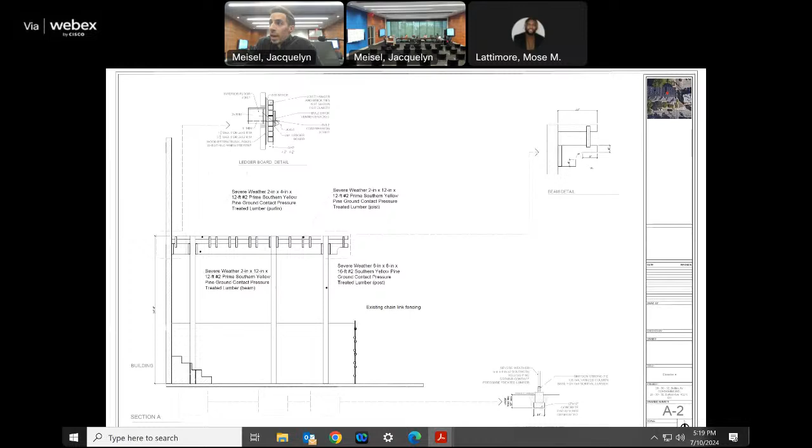Good to see you guys again. This is actually a 6-unit building. We have the last 3 units on the end there, closer to Wall Street. In its simplest form, we want to clean it up and make it look nice and provide some privacy. I think the comment regarding the electrical panel ties in well to having a recommendation for the pergola to be freestanding. I think that actually solves that problem, and we would revise our subsequent application accordingly. Again, at its core, we like some coverage back there. We're not discriminatory as to what type of coverage.

At a previous meeting, I saw a prefabricated gazebo being proposed. It didn't seem like there was precedence for that, or tremendous appetite, but we would consider things like that as well. I guess we're looking for direction. We thought the pergola was probably most articulated and would fit in best, but again, we're looking for feedback as to whether there are preferred options or precedence for covering parts of that back porch. We also just want to add a privacy fence.

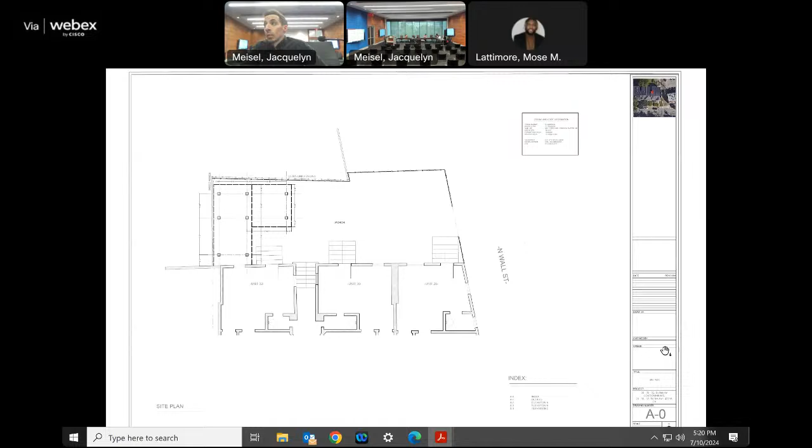Thank you. So I think we had just two items. I think the pergola being self-standing makes sense. And then the retaining wall was also talked about a little bit, so just being able to add a little bit of color and understanding what the retaining wall condition and materiality would be. I think that's kind of what was also in the staff report.

Sure. For the retaining wall, you could go back to an area, not the aerial, but... maybe another one. I'd call it a landscape wall over a retaining wall. What's left of a retaining wall. I should have a better picture for next time, but essentially towards the rear of the property it just sort of juts out. I think all we're trying to do is have that flush with our neighbor's chain link fence, so the landscape wall will come up just in front of the chain link fencing.

This allows for more room for that pergola and opportunity back there for space. I'll get a clearer picture, but that current landscape wall doesn't look phenomenal, and we'd be looking to really just move it back and replace it with a newer one.

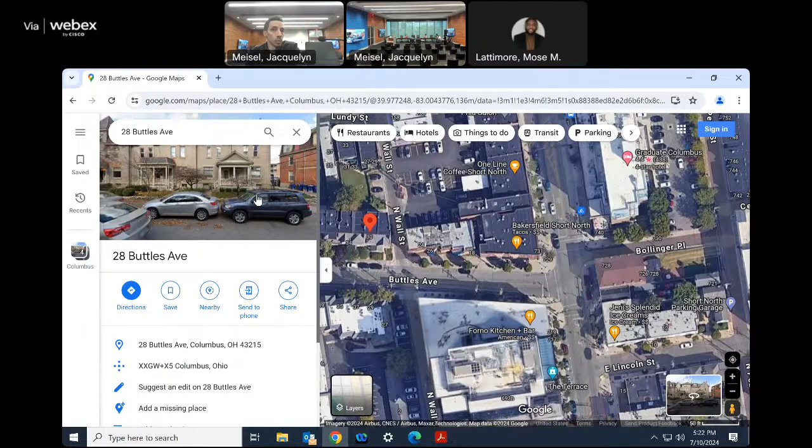Any other feedback or comments or thoughts that would help the applicant advance the design solution? Yeah, I put the electrical comment in there, surprise. I think make sure you're looking into that, because even if you make it freestanding, the conductor is still going to go over the pergola, and there are code requirements for that in terms of the NESC. There may also be requirements from AEP. I don't know if it's AEP or the city power, but they often have clearance requirements as well, because that line is owned by the utility company and has to be maintained by them.

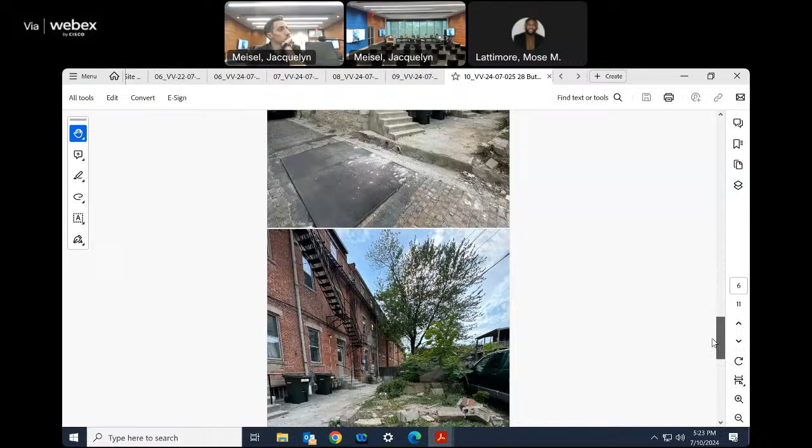So that's a concern, because I think it still had... if we can look at page 6, I guess, that's probably the best view, at least the one I've got. Or is it not page 6? It's the last photo packet. Yeah, so it's before the drawings, go back. So, yeah, still hard to tell. I think that's it. So if you zoom in on that, where the electric meters are there.

So you can see the weatherhead there above the electric meters where it has the drip loop. And that's well below where the pergola is supposed to be. So you could actually have the drip loop interfering with the pergola. It's just a concern, I'm not saying it's not possible, but you're going to have to really check the code on that.

And in terms of building the pergola, you're going to have a problem, because that has to be all roped up for someone to work and build something adjacent to that, unless they're licensed or qualified to do that kind of electrical work. In terms of submission too, just make sure your site plan is complete - any work you're doing on the site, landscape work, or redoing the concrete, and any other landscape, just make sure it's all shown so we have a complete picture.

Okay. The fencing - I think we submitted something in compliance with the Victorian Village guidelines as well. That's okay as well? In terms of fence, is that what you said, fencing? Yeah, okay.

I don't remember seeing the fencing profile. Could have sworn we had elevation. I'm not seeing it, it just says existing wood fence and existing chain link. I didn't see an elevation either, so just make sure that's included.

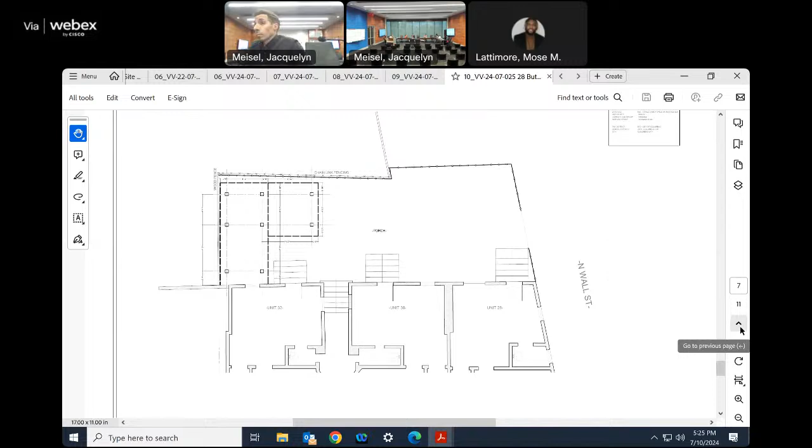And then just kind of thinking about it, materiality for the gazebo and such is really difficult because, again, like we were just talking about with the awnings, it's not necessarily like for like. So we try to take into consideration the character of the existing home. That residential setting is a little bit different than this kind of commercial setting with multiple units. So just don't necessarily say, oh, that materiality is something that was approved on that other project and that setup - that's something that should be appropriate for this particular one. So just give some consideration to that.

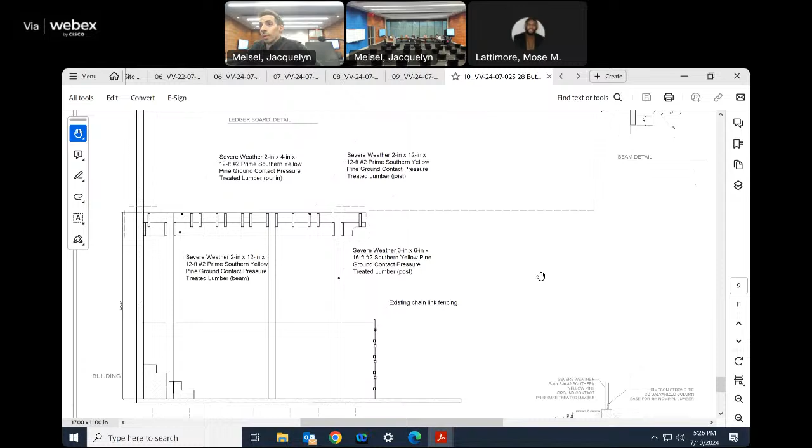Not saying that we want to mislead you in terms of design, or restrict you from that perspective either. So I'm just clarifying that for you, to keep your creative mindset going to solve this particular problem.

Okay, appreciate that, awesome. Anything else we can help you with? I don't think so. I think we're going to be specific with our site plan and layout materials and adjust the pergola in consideration with the electrical panel and weatherhead, and come back in August. Awesome, all right, well, thank you. Appreciate your help. Thanks, thank you everyone.

If there's no one here for the other applications, do we still hear them? Typically, just one more, right? Eight and nine. Oh yeah, so the one that requires action, if the applicant's not here, I recommend continuing so they have a chance to come back. They're both required action.

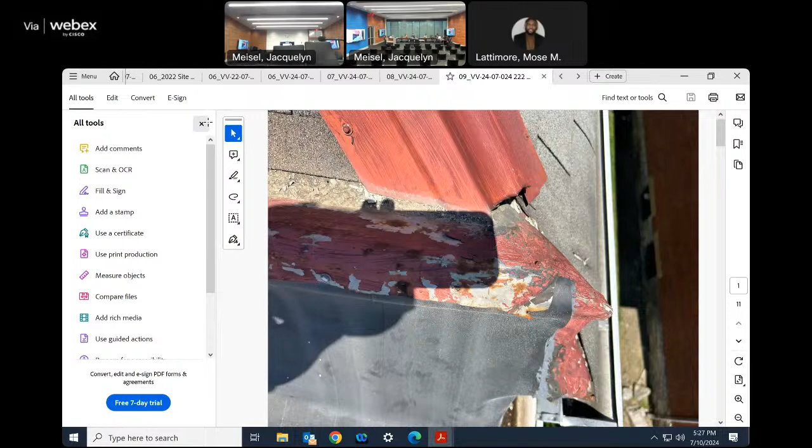Yeah, so for any required action, unless it's something the commission feels very comfortable with, no questions or concerns, and fine with approving with no conditions, I would say continue so they can come and have that discussion.

It seems like both are continued. Is that right? I'm just taking a look at the applications - I'll give you guys some time, I was just reading the application. Eight is definitely a continue. Is nine really? That one I couldn't really grasp what's happening, that's different. Yeah, that one has had a lot of different work and fixes over the years. Just trying to figure out if that's a good solution. And it's not something we need their input to explain it - go for it, yeah.

All right, well I guess I got a couple of motions here then. Don't need to introduce the nine. Thank you, guys - Pete took one of them. Easy one, right? I'm like, I gotta get the practice when Tim's not here.